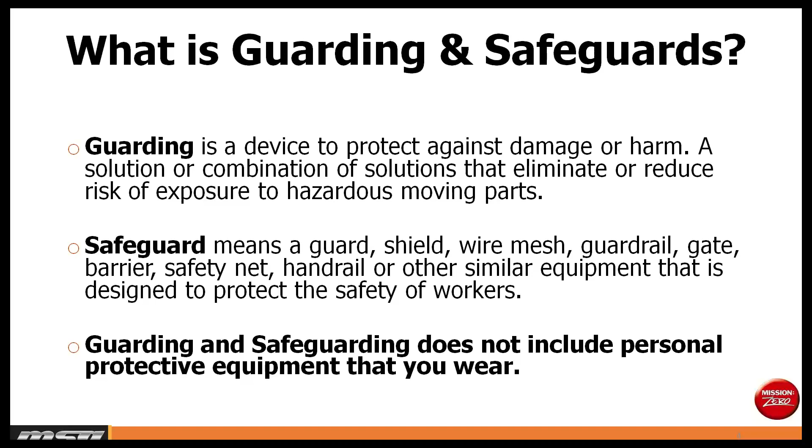And unfortunately, in our industry, 3 examples came to mind immediately that I've had some engagement or discussions with our members on. And I know there's so many more, and each of us may have been touched by a situation that involves guarding or have had calls or situations where we've been exposed to different types of guarding hazards.

And I remember this one, it happened at a small farm equipment dealership in a smaller community where a technician was testing a mower conditioner, and he was listening to the drive line just to check if there's any unusual sounds around the U-joints and support bearings, and got too close. And this was an unguarded shaft, and that person lost his arm between the elbow and the shoulder.

And I got a call from that dealership a few hours after this had happened, quite concerned with what had happened at this business. And this had a real effect on that community, the dealership itself, first responders, to witness such a traumatic event at that business. That's one that sticks out with me when I think about guarding.

Another one not as severe, a technician was pressing a bearing and the bearing shot out of the press and nearly contacted the worker, but went through the window of a combine. So a situation where guarding was absent, but it could have been as severe if it hit the worker or people in that trajectory zone.

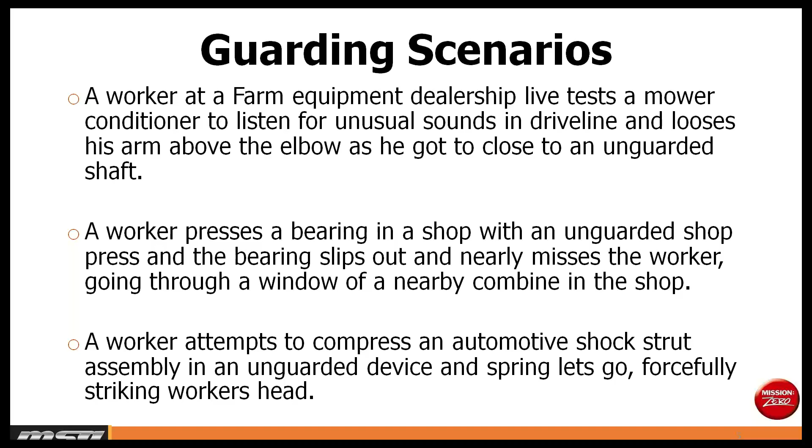We have found as well that many incidents from guarding occur because someone removed a guard, perhaps doing some maintenance to the piece of equipment, and the guard is laying behind the tool or the equipment, or it's disappeared over time, and it was just never reinstalled. And in these situations, the severity of situations involving tools, machinery, and equipment is often high when it comes to the outcome of the injury. So people can have amputations or death or very serious outcomes as a result of unguarded equipment.

And when we think about guarding, there is a relationship to lockout tag out. We cannot just solely rely on our guarding to be effective. You still need to practice lockout, tag out, that energy isolation and releasing of that stored energy when conducting that service and maintenance. For your information, we just rolled out a free Lockout Tag Out online course on our website, which I would recommend as well to people to take.

When we think about these tools and equipment, I talked about the shop press and the shock strut assembly for compressing springs in an automotive business. These did not have guards on it. It is still the employer's responsibility to ensure that safeguarding is installed. And I found this interesting. I was looking through a tool catalog, and within that catalog, I saw an advertisement to purchase a shop press, and then below it, there was an add-on option to purchase a guard.

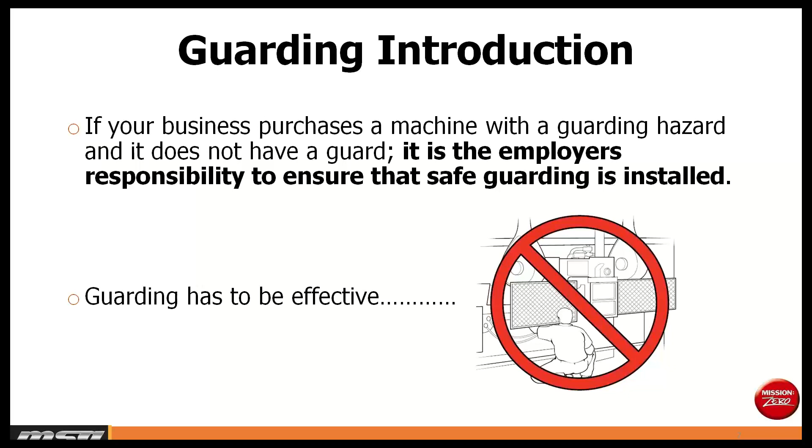And when you are looking at guarding or adding guarding to equipment, the guarding has to be effective. You can see on this picture, the person is reaching underneath the guard to adjust or maintain a piece of equipment. The guarding needs to meet standards. And one of those standards is the opening related to the hazard behind the guard itself. So we look at the hole size of the guarding as opposed to the distance of the hazard it's trying to cover. And this chart makes reference to what that hole sizing could be. The larger the hole size, the further the distance has to be to that hazard. So I will be sending you out this chart as well as the guarding standard for a reference that you can utilize when it comes to using the appropriate guarding in the workplace.

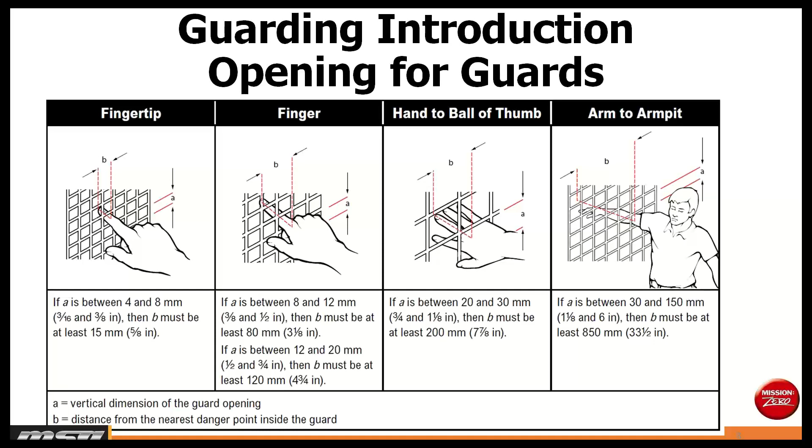And I went into our WCB statistics or data that we receive, and over a 4-year period, we've had over 2,700 claims that could be related to guarding. These were defined as contact with objects and equipment. Huge costs to our industry, over $5 million in that same 4-year period. This could cause or relate to employers paying more in surcharges, as well as an increase in possible premiums, the more usage that we have on these types of claims.

As well as for our employees, the people who were hurt. There's over 166,000 days lost experienced in our industry. And we think about that from an opportunity of absenteeism, lost productivity, and as well as people just being away from meaningful work when they are hurt from contacts with objects and equipment. So that's some of the data.

But I looked closer within our OHS regulations in Saskatchewan, and I went to the electronic PDF version. The word guard was used 48 times in our provincial regulations. And I took a copy of some of those more common regulations and have put them on the screen here.

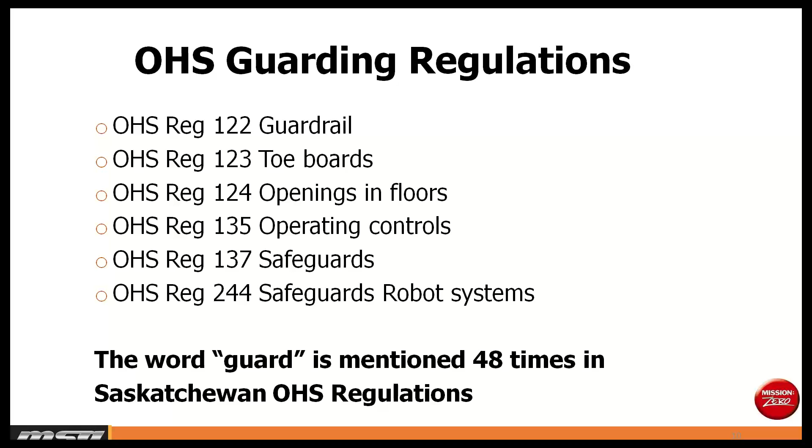I did contact the Ministry of Labour Relations and Workplace Safety's OHS division just to get a bit of a snapshot within our industry up until the third quarter of 2020, back from 2016, to look at some of those regulations and how they relate back to where our members received those contraventions. And some of these may stand out for you or not.

I did ask the officer that generated this report in regards to Regulation 244, safeguards for robotic systems. And I was told that they had been using Regulation 137 as the one that they would cite in those robotic types of systems. So I just ask you on the line here now through the question box if any of these numbers do stand out at you, or if you had any thoughts in relation to those.

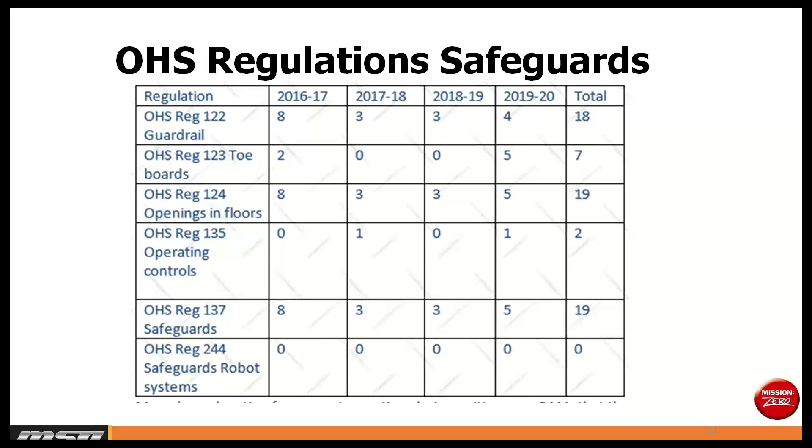And while those do come in, I want to mention my appreciation for filling out that poll. And I think that gives some good insight that 63% of you have had an OHS contravention related to guarding. So good information to fall back on here as we progress through the webinar.

I'll now talk a little bit about the hierarchy of safeguarding. And if you may have heard of the hierarchy of controls, this will be similar, but it's going to be a little bit different, and you'll see what I mean as we move through the webinar. The first step is always eliminating the hazard. So if there's a way that we can eliminate the need for human interaction in the process, perhaps we don't have to have a worker in that trajectory zone where they could be exposed to that hazard.

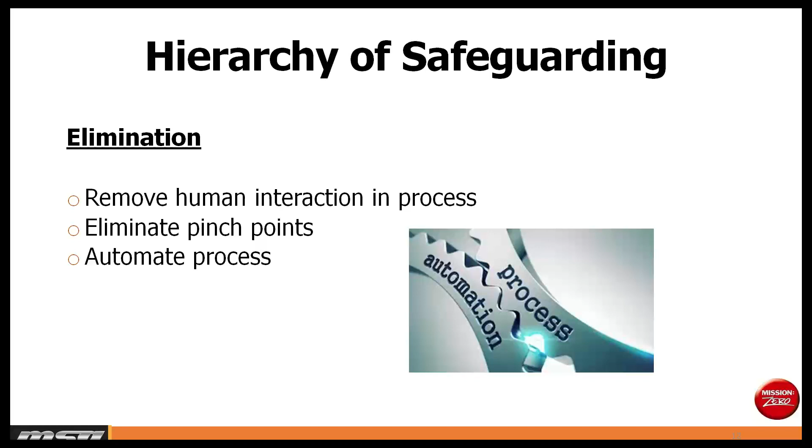Or we can eliminate that pinch point in the process so that the worker doesn't have the opportunity to be in that zone, or using the automation process if possible. So a lot of times we cannot eliminate the hazard, but this is where we want to start, is perhaps we can eliminate the hazard in that first step.

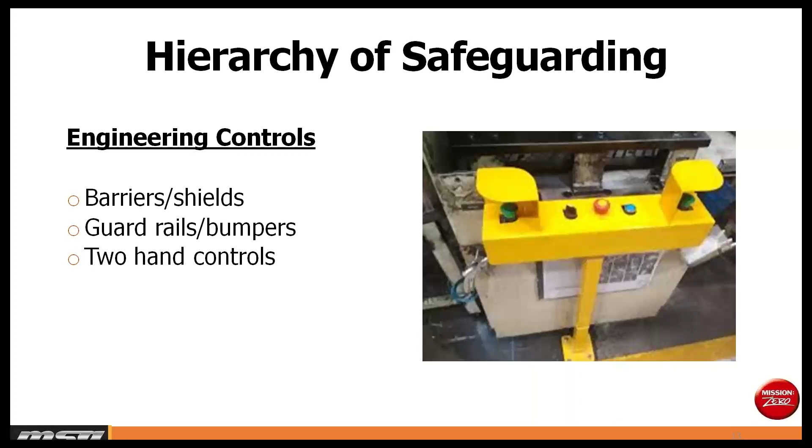If we cannot, perhaps we can look at engineering controls. And this is, I think, what I thought about, and maybe what you think about as well when it comes to guarding. Again, these are those physical devices, those barriers, shields, guardrails. On the picture, there's a two-hand type of control. And this is, I think, the physical type of engineered controls when we think about guards or safeguarding in place. So if we can't eliminate it, perhaps we can protect it by using these types of engineering controls.

And this one was new to me when I was researching guarding. These are those awareness controls. And I've only ever heard this in terms of guarding and referencing to guarding. And this helps create awareness because we can use lights, beacons, perhaps safe walkways or safe zones that people can walk in to stay away from that hazard. So we still, if we can, eliminate it or engineer it out with barriers, but these awareness controls also do that. They create that form of awareness.

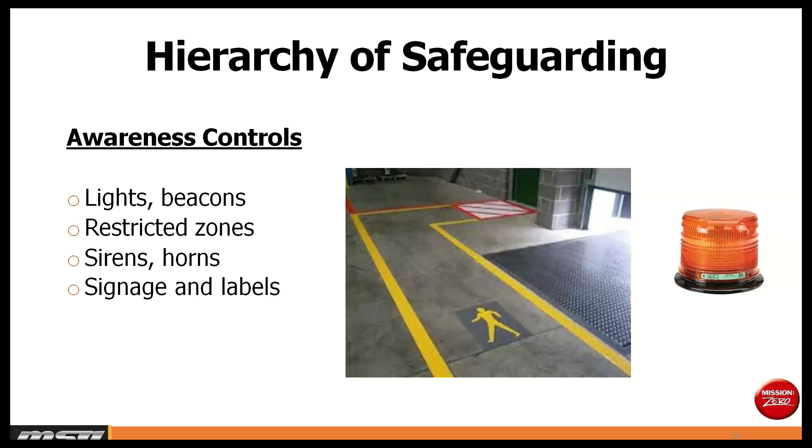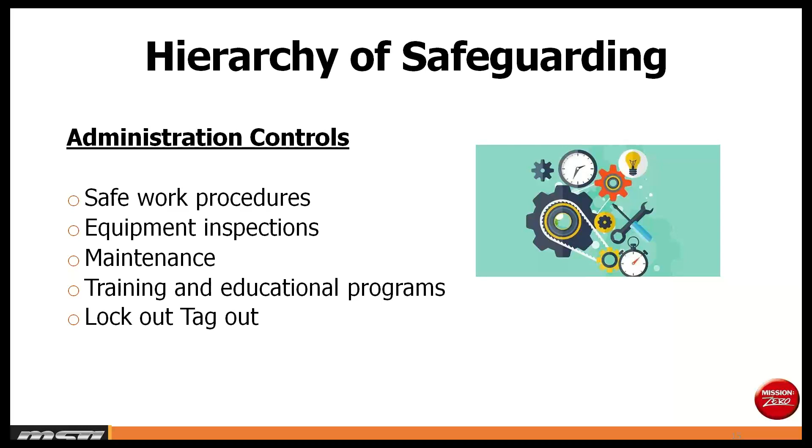Next, we have the administrative type of controls. This is what we would see on paper or process that are used in addition to the guards. This could be our training program, our inspection and maintenance, or using this type of information that we can utilize for our members, giving them that type of administrative access to training and processes of equipment and maintenance.

And lastly, the personal protective equipment. This is the final step in the hierarchy process. And remember, PPE such as safety glasses, respirators, gloves, visors, and hearing protection are not guards. The hazard is still there. If we weren't successful in eliminating, engineering it, or using awareness or admin controls, the PPE will help complement that.

So if we can still use the engineering, awareness, administrative, the PPE is that last line of defense and should never be used as your primary source of safety in the workplace. So that's just a quick rundown on the hierarchy.

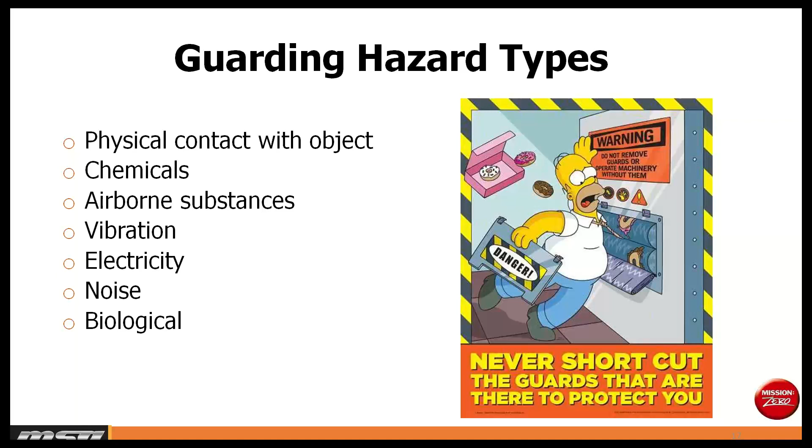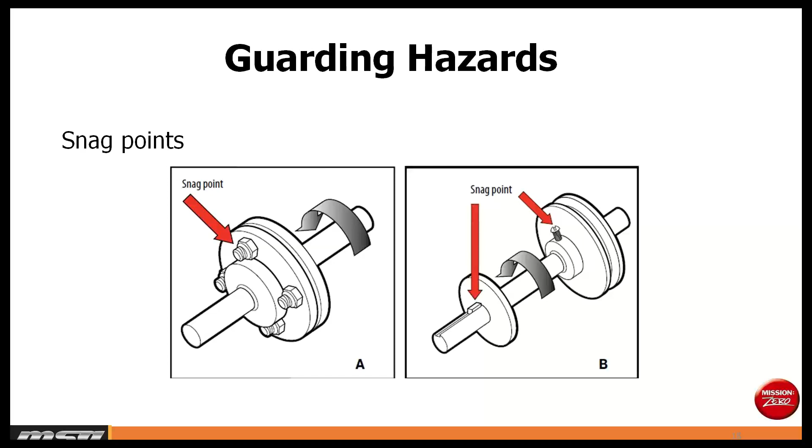The next is the nip point. The nip point occurs when machine parts move towards each other, or when a part moves past a stationary object. So we have our belt turning, and eventually it meets the sheave or the pulley, or the chain's turning and eventually meets that sprocket. At that point where it meets, that's the nip point where we can have contact. Some people may call that a pinch point, which is perfectly fine.

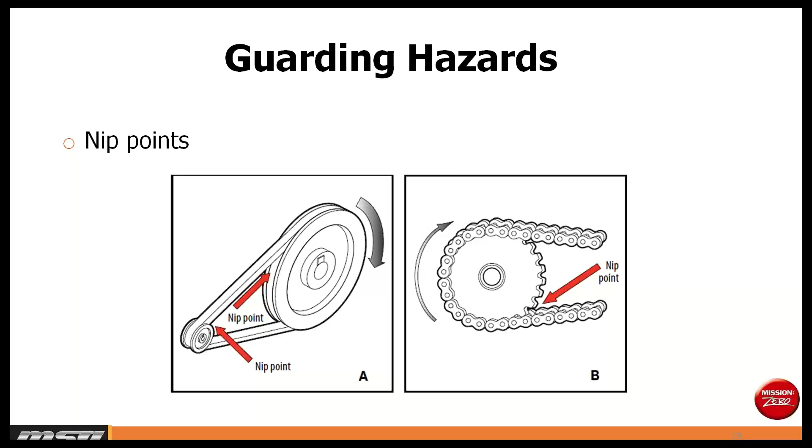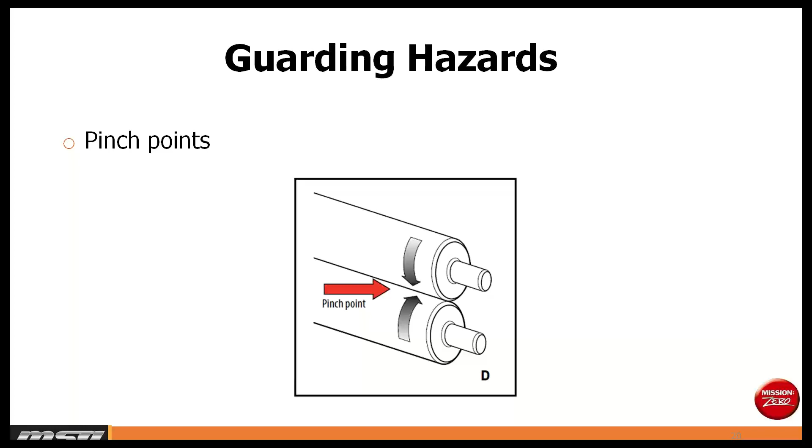So now I'm going to talk about the different industry examples, and this will make up the remainder of our webinar. I've got 36 different slides of guarding hazards with specific industry examples used within our membership. And this is where I'm going to ask you to have some fun and participate in the question box. If you've used any of these examples, say that you like it or you don't, or give me some feedback on it. And if there's something we've missed, let us know as well, because there are opportunities to share that with our attendees today. So keep that in mind.

Also, if you are obtaining any of the types of examples you see, ensure that guarding is engineered, approved, and not home built. That's an important thing to mention. As I mentioned in the disclaimer, do your homework before purchasing any of these types of products to ensure that they will work for the machine or equipment that you're going to be putting them on. I see some of our members have done excellent jobs of procuring guarding because the equipment didn't originally come with it. And again, it is an employer responsibility to ensure that our machines are guarded.

Let's talk about presses. I used this in one of the scenarios that we started with. This is a great example of a chain mail type of press guard or curtain. These are actually made right at a manufacturer in Swift Current. You can provide them with the size of your press opening, and they will build you a press guard to fit the size of your press. It kind of works like a shower rod and curtain. You can hang it onto your press by bolting it on.

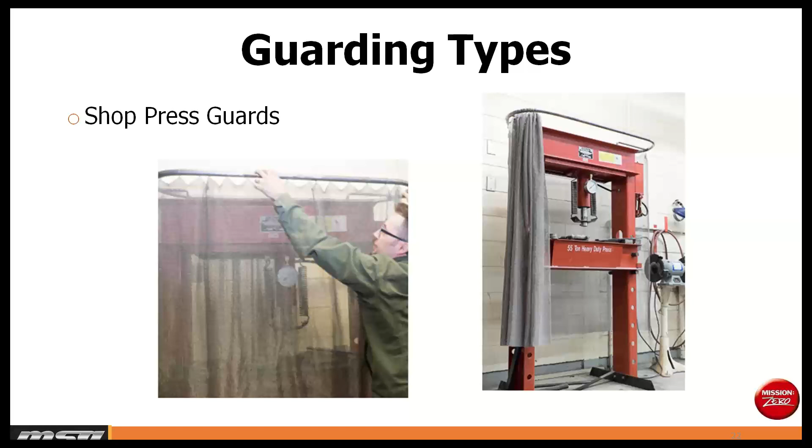And this works well. The engineer tested it at a manufacturer in Swift Current, and they had some real positive results that came out of that. So this is a great type of tool guarding that was used on a shop press.

I did see another one used. This is kind of like a foil wrap, and it encloses the area that you're pressing so nothing can fly out. The downside is this is hard to see out of because you've kind of covered the whole thing together. And if what you're pressing happens to slip out, it's not an effective guard because it's all kind of attached together. The press curtain on the previous slide was the more common one that we have seen.

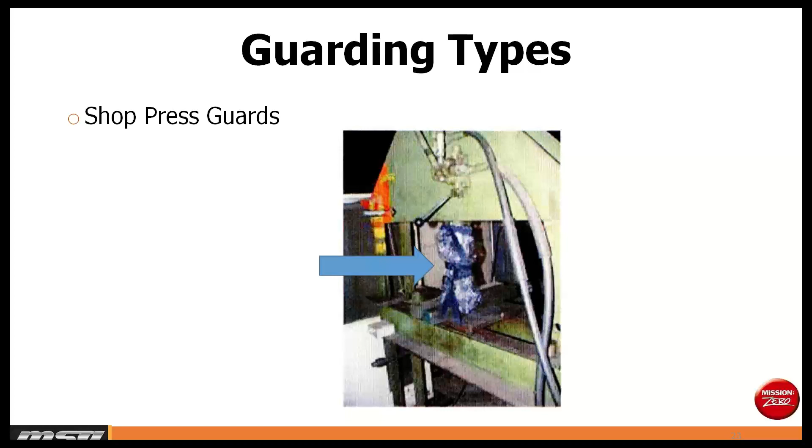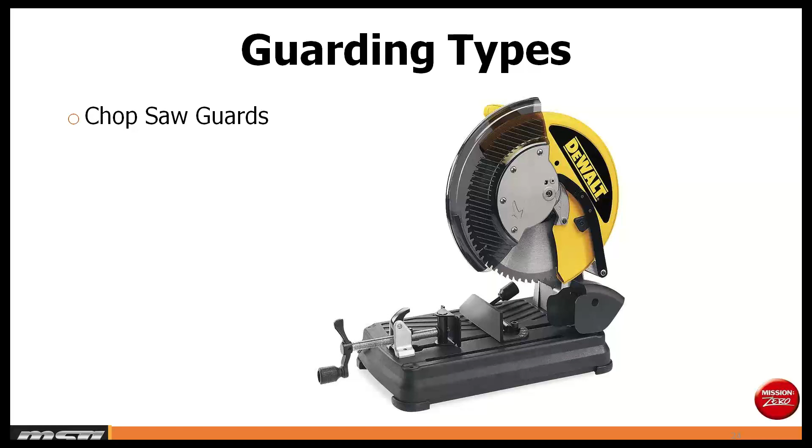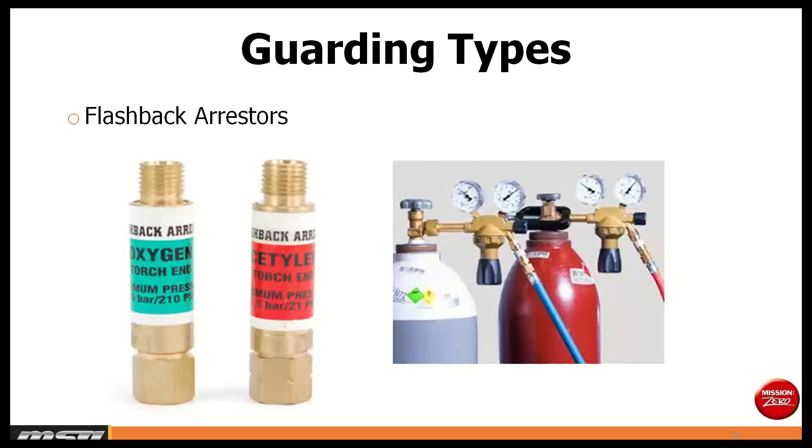You may not think about flashback arresters as a type of guard. These are commonly used on our oxygen acetylene units to stop the flame or reverse flow of gas back into the equipment or supply line to protect the user from equipment damage or explosions. These need to be located between the torch and the hose end. And they look like these little check valves as you see on your left. The caveat to this is I've sometimes seen flashback arresters built right into your regulator units with your gauges and those assemblies. If that's the case, it's going to be clearly labeled and you're going to know about that.

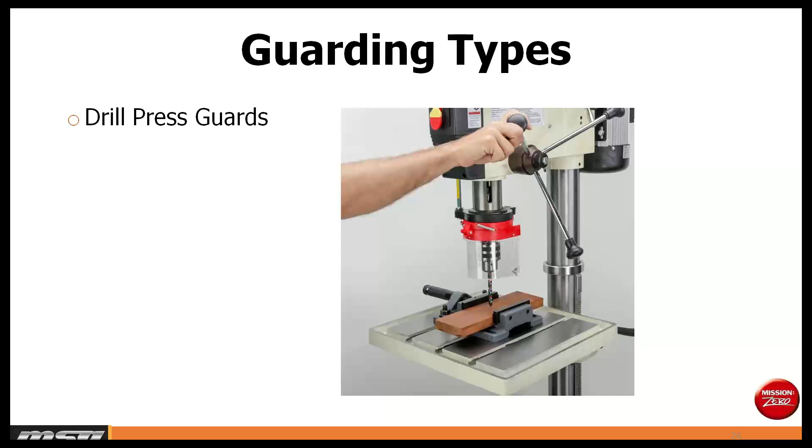Next is a drill press guard. This handy little unit clamps right onto your drill and it works like a face shield or a visor. It flips up and down so you can change the drill bit. It moves as you drill into the piece you're drilling. It's awesome. You can see through it. It's just a great guard, and I don't see as many of these out there as I'd like, but whenever I do, I always give the member a thumbs up because these are just fantastic.

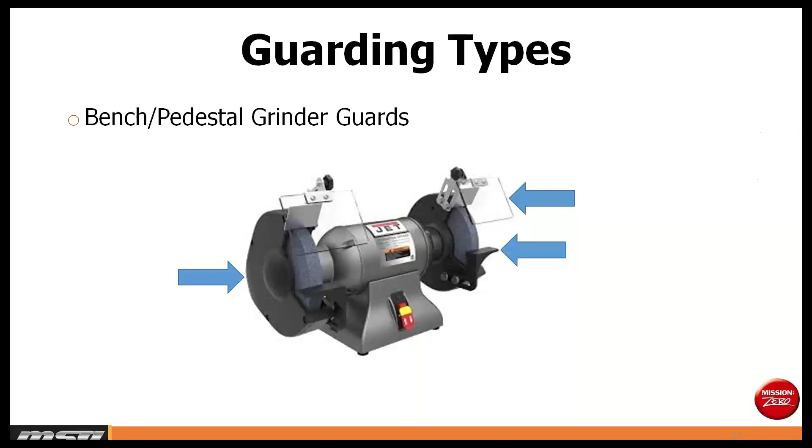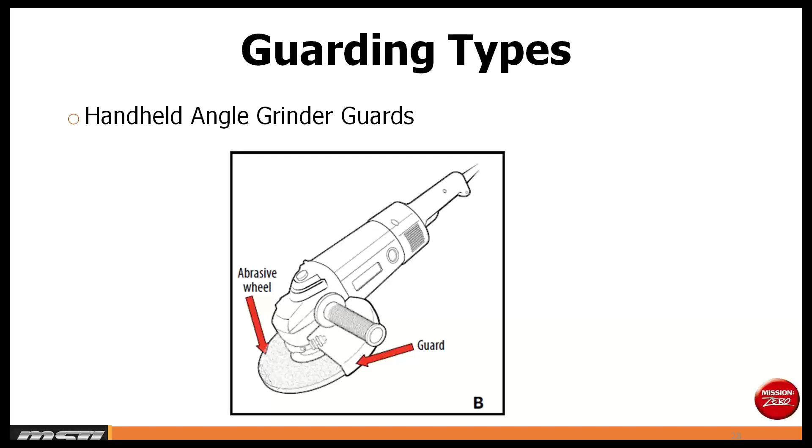Similarly to a bench grinder, when people change out the grinding wheels on this, sometimes they neglect putting the guard back on. So again, we're always looking for these types of guards when we are doing our facility inspections. And as for yourself, keep these in mind as we go through these examples. Think about what's in your facility and are you in fact using the guards?

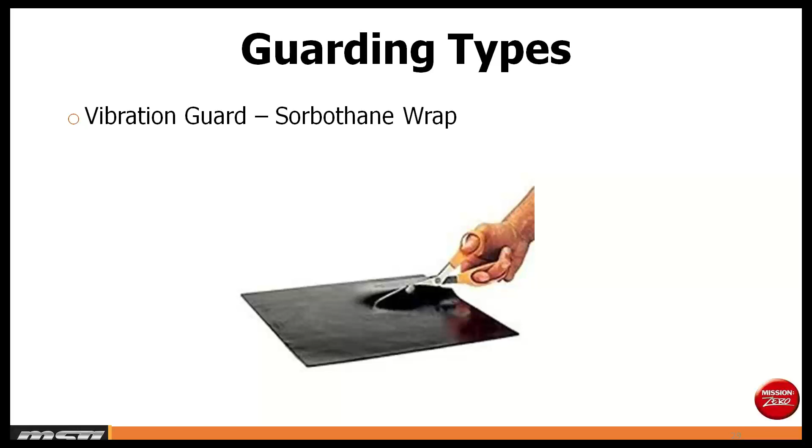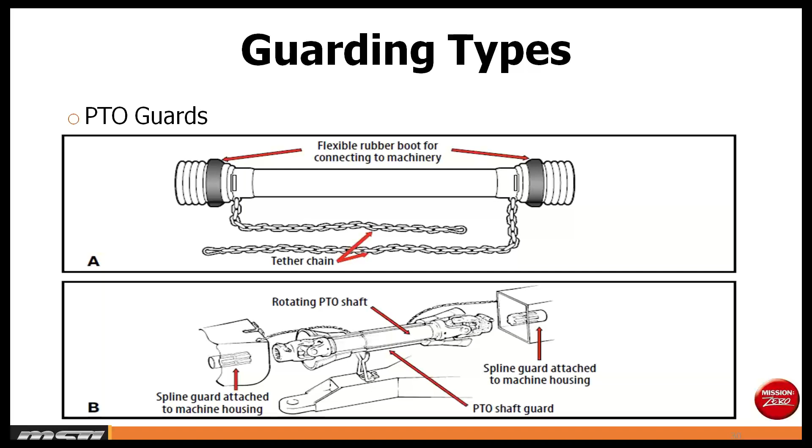The next one is a PTO guard. I won't spend a lot of time on this. I'm sure you're very familiar with PTO guards. They account for a large number of serious entanglement injuries. The top picture is a plastic guard or shield. It covers the rotating shafts, as well as the bottom picture. You see where the arrows are. Those are your PTO doors or covers. They fold down to cover the spline shaft. Could be on your input, which could be from a tractor, or the implement side of a piece of equipment where your shaft goes. So the cover itself, as well as those fold down doors, are good examples of guarding.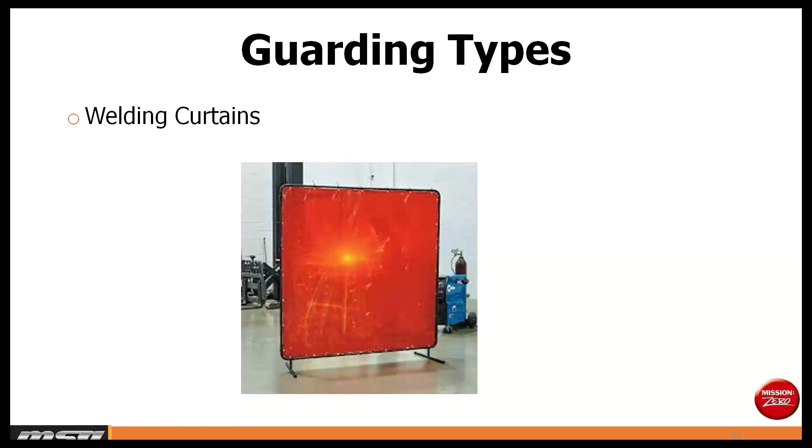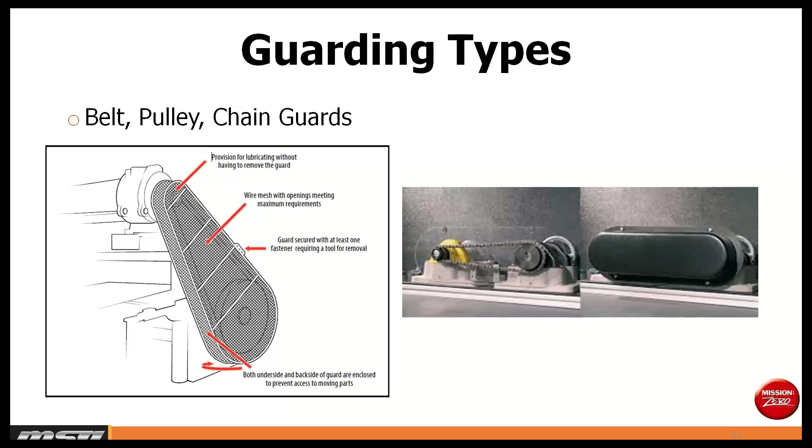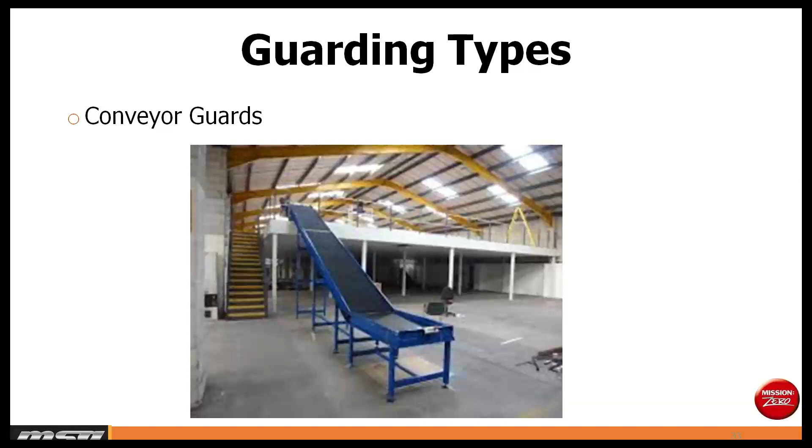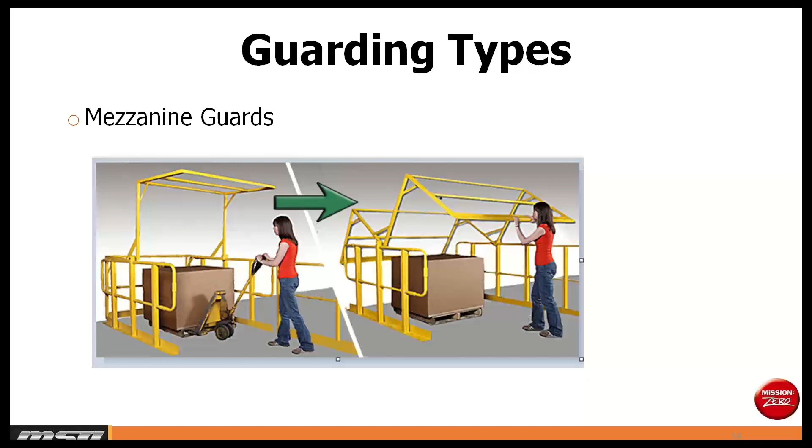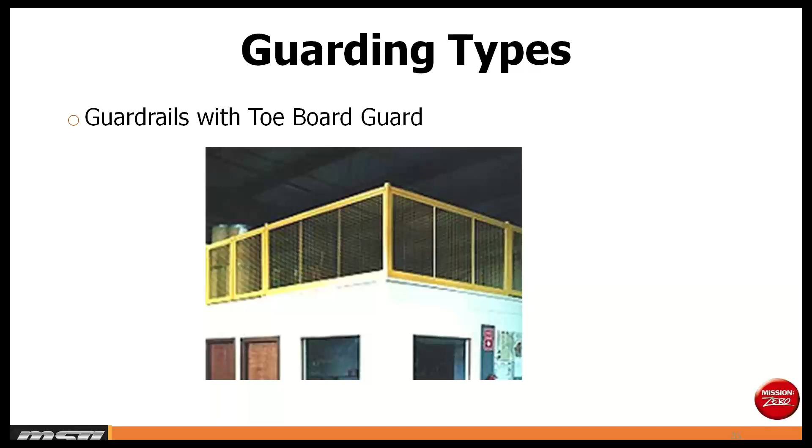And I've actually gotten into some conversations where I've upset some contractors of construction companies. We've been invited into new dealerships, and when they're building the dealership, the contractor has put the guarding up, but they didn't put toe boards on. So we'll say, hey, this does not meet the OHS regulations for toe boards. And so we have a conversation, and they eventually have to put it in. But this is one that gets missed somewhat when it comes to toe boards on the guardrails. And the toe board protects so that items don't fall through the bottom. This was one that OHS had commonly cited as well.

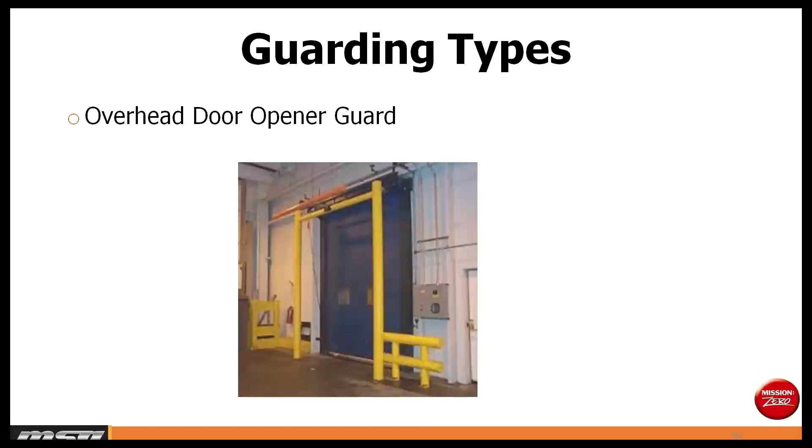Here's an example of an overhead door type of opener guard. It just prevents pieces of equipment from contacting the overhead door. So that's an example. And just to back up to the mezzanine that I spoke about with that flip guard, someone else mentioned they'd seen remote types of doors, openers, and buttons, which do work great as well. Another one I've seen used, which I hadn't mentioned, is a guardrail gate that pulls across, also used in those mezzanine areas.

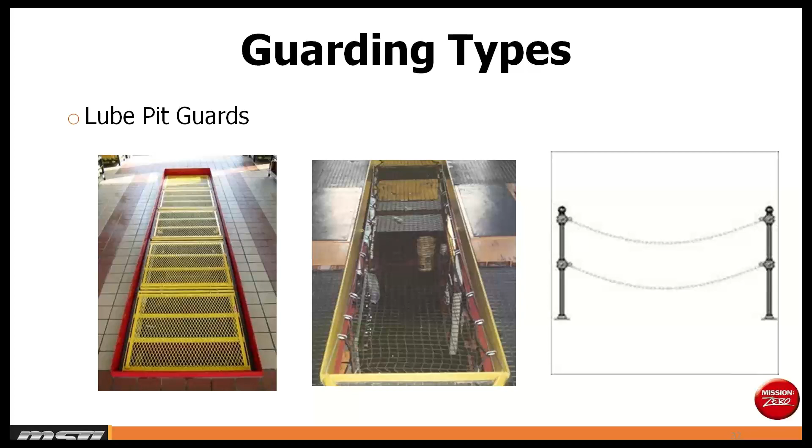You just can't run across some snow fence and call it netting and be unsure of what it actually holds. And you can also use railing around your open pits, but it has to meet regulation 122. And that just speaks to the spacing of the horizontal cross members. So again, those are some different types of examples that can be used.

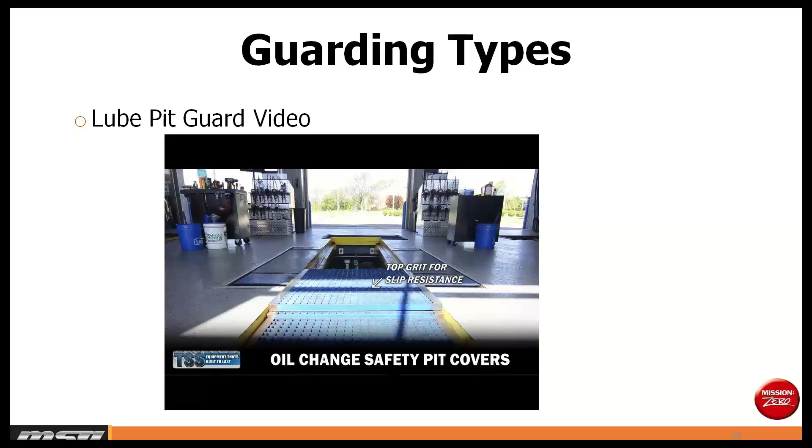And as I was mentioning that, I did put the video on. I left the sound off on purpose just to give you an example. This is that grated type of lube pit cover. It essentially slides over the lube pit, and workers can store it when it's not in use, and it quite easily slides on that type of tracking system. So again, a lot of different options out there that can be used.

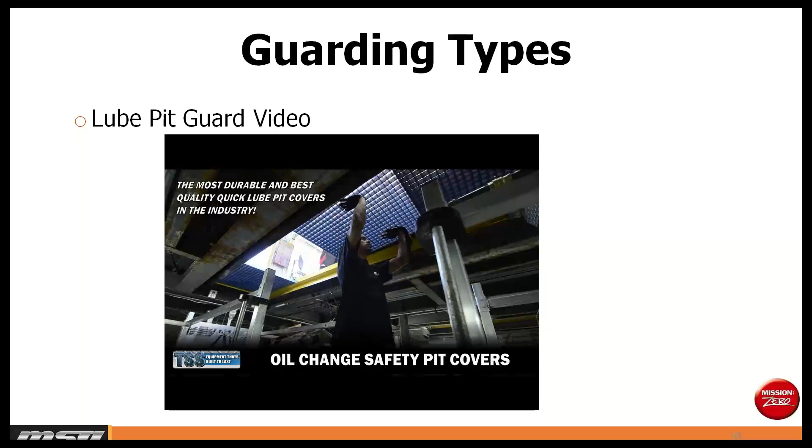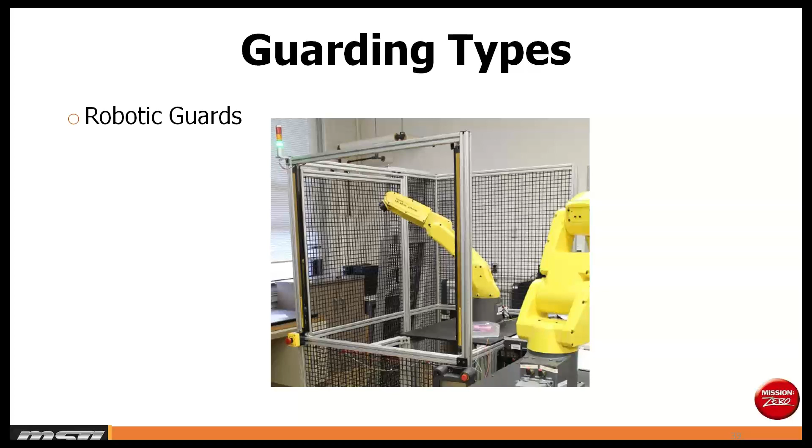If your business uses robotics, your robotic system needs to be guarded, keeping in mind the area of travel of that robotic arm, that the guarding has to be applicable. You can see on this one too, it's got that awareness control. It's got that little beacon light on it also. We don't see too many of these in our service and sales types of industries, but they are out there. And when we think about the elimination of hazards, robotics can definitely do that.

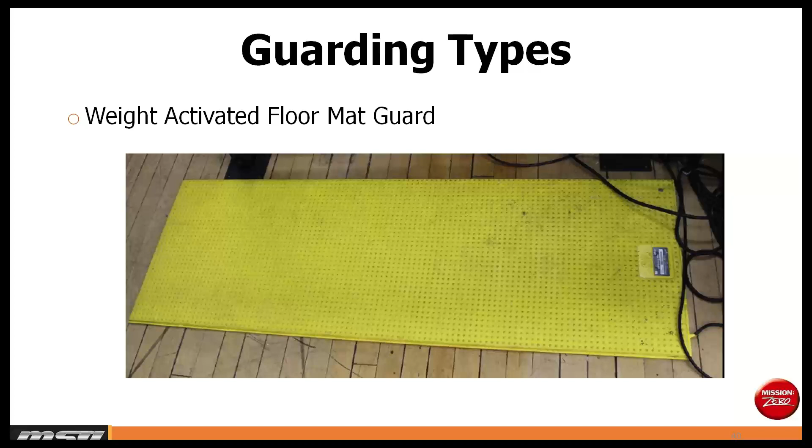Another example is the floor mat in front of a workstation. This is a guard that is weight activated because the worker has to be standing on the mat in order for that machine to work that the person is using, and it keeps the operator safe out of the trajectory zone. So it's a weight activated type of guard device that keeps workers out of harm's way, is its intent.

Another example around racking is, for one, make sure your racking is secured to the floor. And in the securing process to create guarding, there's a barrier you can put around your racking to prevent accidental contact. If you've ever seen on YouTube, I didn't put the video in there, but there's videos of people who contacted their racking with a forklift, and these things go down like dominoes because they're all bolted together. So that's why these have to be secured properly to the floor.

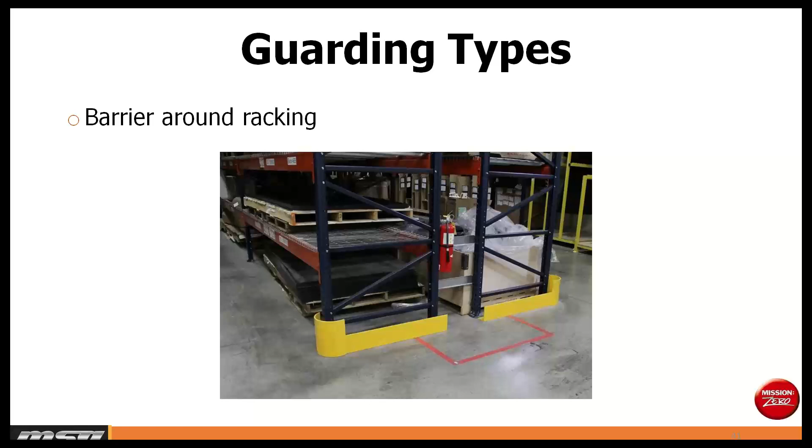And with this guarding that you see, it allows for people to have that additional barrier to prevent that accidental vehicular contact. So these are good add-ons. I'm sure most of you have racking at your facility.

Light guards, this is a very common one that we see businesses being written up for in our industry, especially in parts departments or storage areas where there's racking and people have items on the top shelf that are light, perhaps air filters or light types of parts. And if they grab those off of the top shelf, they could make contact with the light and have glass covered all over them.

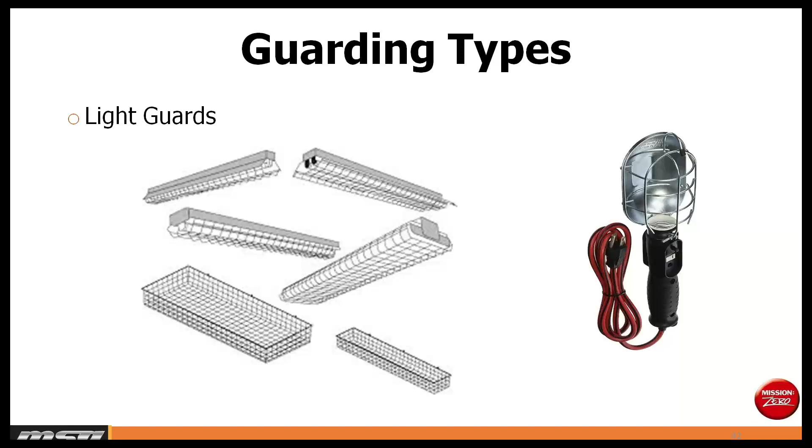So this is something, again, contractors have had those conversations. They've done renovations at dealerships. They never put the light guards on. So this is one that is very commonly cited in our regulation where businesses don't have guards on their lights when there's that close storage of items to the light area.

Another one, these next few examples are just around vehicular traffic. Having a guard around your natural gas meter prevents contact with the vehicular traffic. Damage which could occur from contacting a gas line is very severe. And even to think about winter, people are doing snow removal, they can get too close to the buildings. So these types of guards are a very preventative measure. That's something that I encourage you to ensure that you can put into place quite easily.

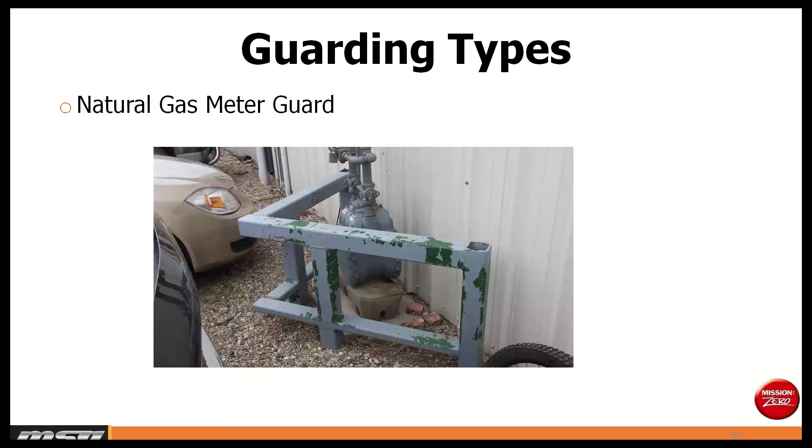Next type is traffic control guards. For traffic control guards, these could be those awareness items that we think about, such as those beacons, signage to create awareness with speed limits, routes of travel with arrows, and we're guarding against contact with vehicular traffic. And I'll tell you, we've been very busy with this lately.

Last week in our announcement to our members, we mentioned that a lot of our businesses, our membership, is getting written up for not having an adequate traffic control policy or plan in place. So we've been busy going out to members, helping them put a traffic control plan into place. And it's an example of guarding.

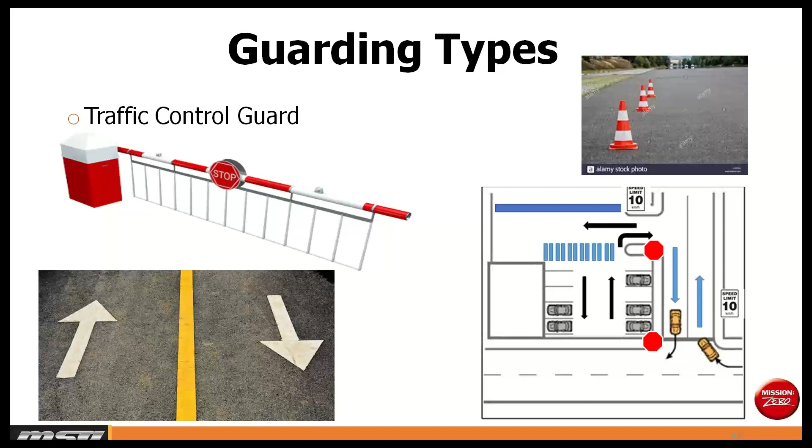And again, those directional arrows are something that's covered in that plan, as well as the drop-down arm as part of the barriers that can be used, as are these types of vehicle bumper guards that prevent damage from vehicular traffic to your building site. So these, again, help for that property damage, and it's quite an easy guard to put into place.

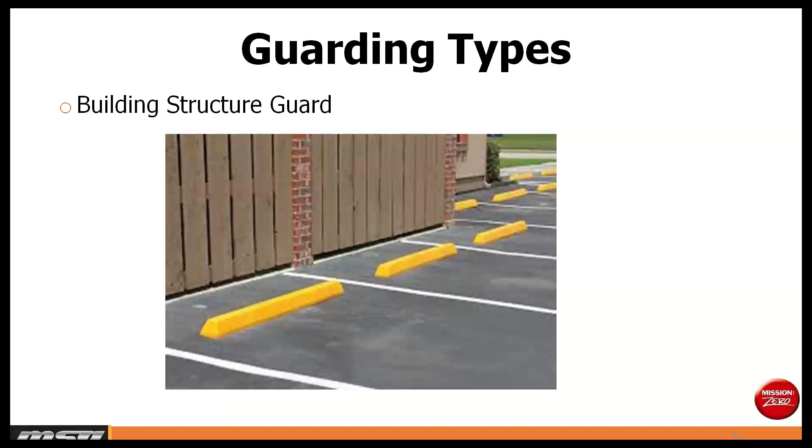Truck box hoist guards: these are engineer approved and fit underneath the truck to hold the hoist up. This is something that is critical. We've had a serious outcome as a result of this in the past in our membership, and it's just ensuring that we have the adequate tools, so we're not stuffing wood blocks in here or some stand we built ourselves. There is the right tool guard available that can be used to keep people safe. This is one of those high severity outcomes if we're not using the right equipment.

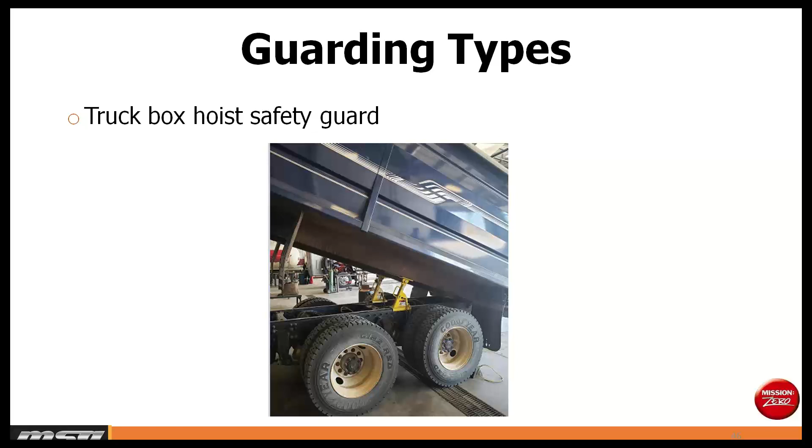I talked a bit earlier in my example about strut compressors, and the picture on the left of the strut compressor does not have a guard on it. And it never came with a guard, but it's still the employer's responsibility to ensure that the tooling they use is guarded. And there are some examples of aftermarket guards that can be used to keep people safe, as this was one that has caused serious injury in our sectors. And we always point these out when we go to our automotive type of repair businesses.

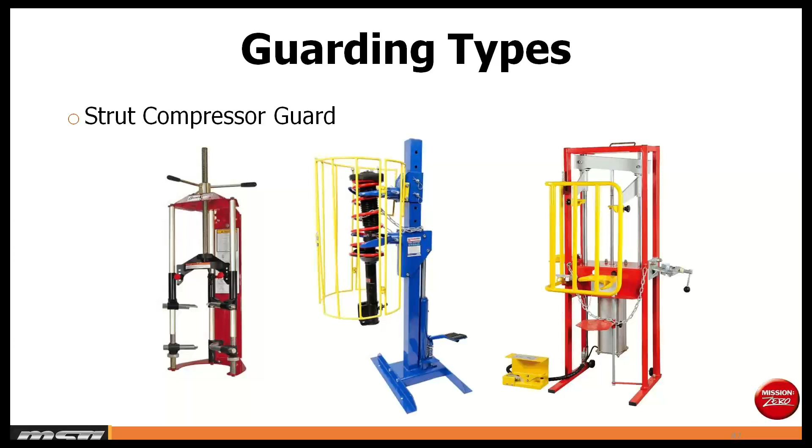Tire changing guards or cages are something that needs to be in place when people are airing up a tire. If a tire were to zipper, this type of guard will catch that tire and contain it. So this again protects people when they're airing up a tire on vehicles, heavy trucks.

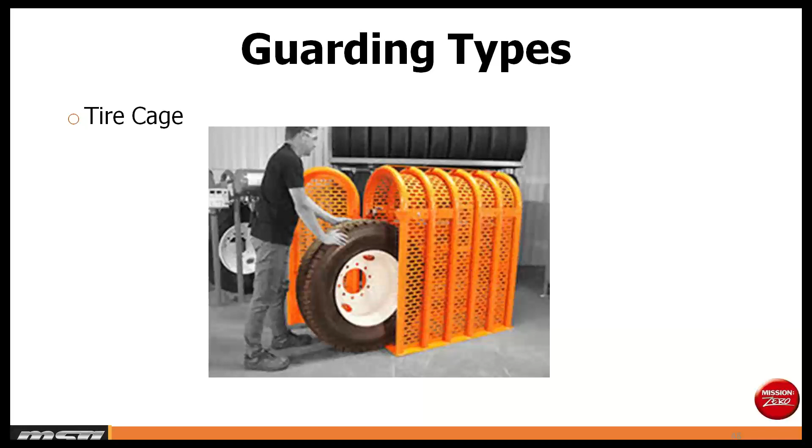This type of guard is a lot more common. It's gained popularity, especially in recent months. Sneeze guards, as we see in parts departments or front desks or reception areas, have been put into place to protect workers from airborne types of viruses. So again, you may not have had this last year at this time, but I'm sure you may have something like this now or other protocols to prevent these types of viruses.

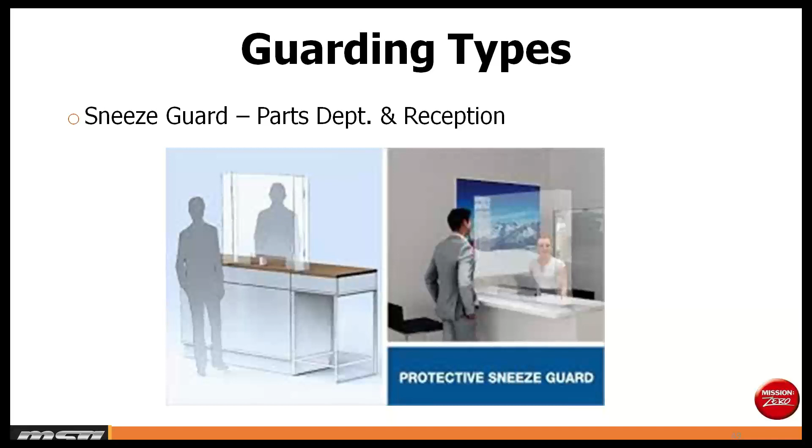Noise guards or sound curtains are designed to isolate an area or sound and to keep it in an area of containment. And when we think about our dealerships and the businesses that we work with, pressure washers, sometimes we see there's a separate room where the pressure washer pump is located to isolate that noise. Air compressors can also be contained in a certain area to isolate that noise. So I think we've really emphasized that noise control process in the past, and we don't see matting or temporary things like these walls set up, but we've seen more relocating of those noise sources, and our members have been doing a real good job of that.

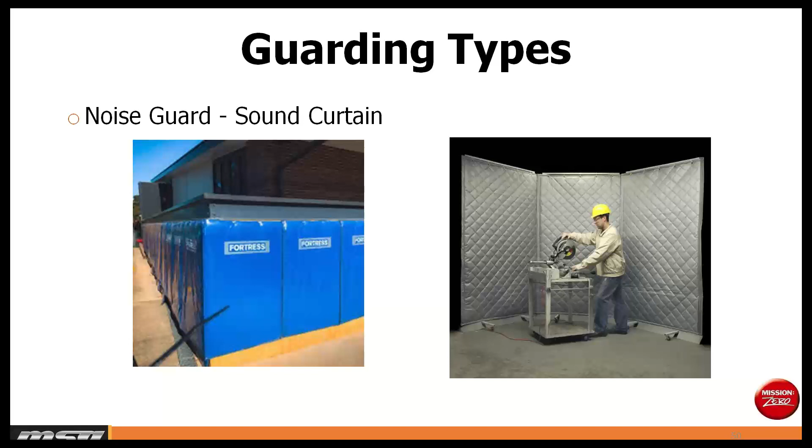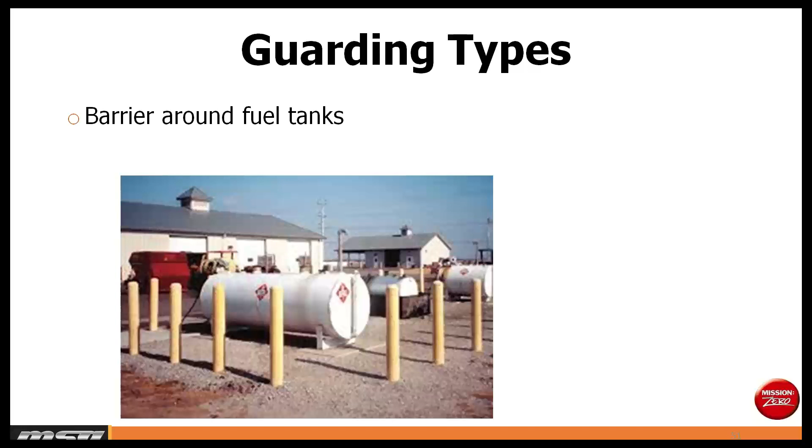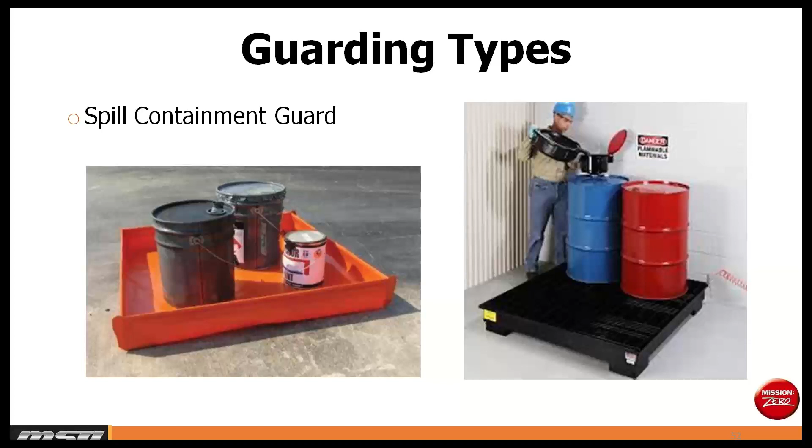When it comes to liquids, unfortunately, I don't see these enough. Some of our members have these, and this is a guard for spill containment. You can set your barrels on top of it, and if there is any type of leak, it's caught in this type of guarding. Unfortunately, I see mostly oil spills with some Zorbol or some sorbent materials around it. But I'm thinking these are going to gain a little bit more popularity. I know a lot of leading employers are focusing on protecting our environment as well, and this type of control is helpful.

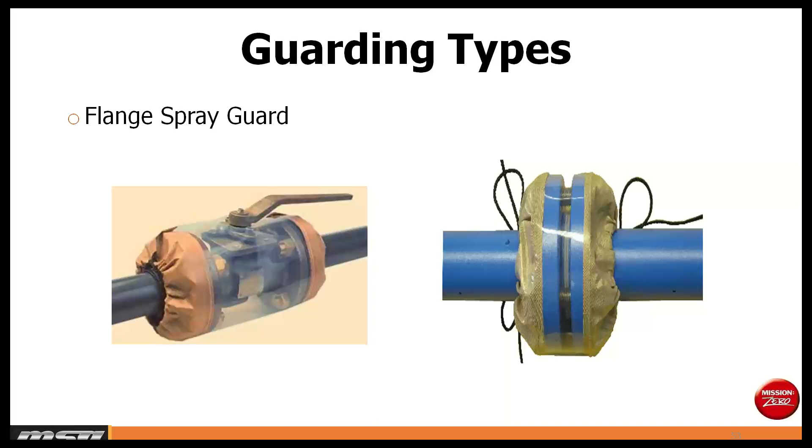As is this type of guard. If you're moving liquids, this is a flange type of guard that is designed to catch those slow leaks. And you can see through it whether you have a leak or not. So that's a great example of that type of guard if you are moving those types of products.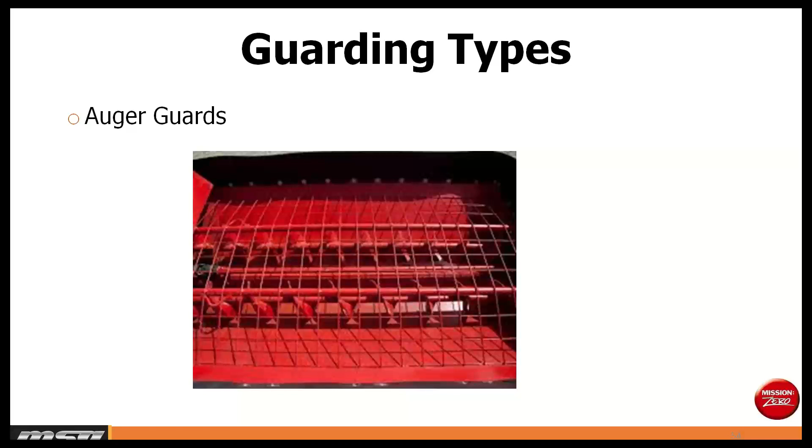As well as auger guarding on pieces of equipment. In our industry, we work with companies that are working with grain distribution, and they're servicing augers and flighting, and just to ensure that the necessary guarding is in place to prevent being caught in auger flighting. Very hazardous and severe.

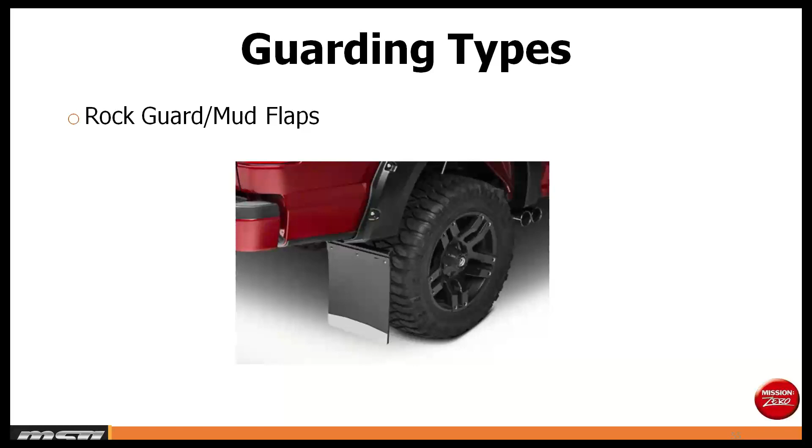Mud flaps, an example of guarding. These are mandatory in Saskatchewan, to have some sort of mud flap. These are designed, or rock guards, to protect windshields from paint chips or flying rocks as we are moving down our roadways. So if we're pulling a trailer or an RV, it's good to have guards in place for sure.

And on an RV, we have a propane type of guard that covers our propane tanks. They slip over the propane tanks, and we work with our RV dealers closely. And this is something where you want to ensure your RV tanks are covered, again, to protect from that flying type of debris.

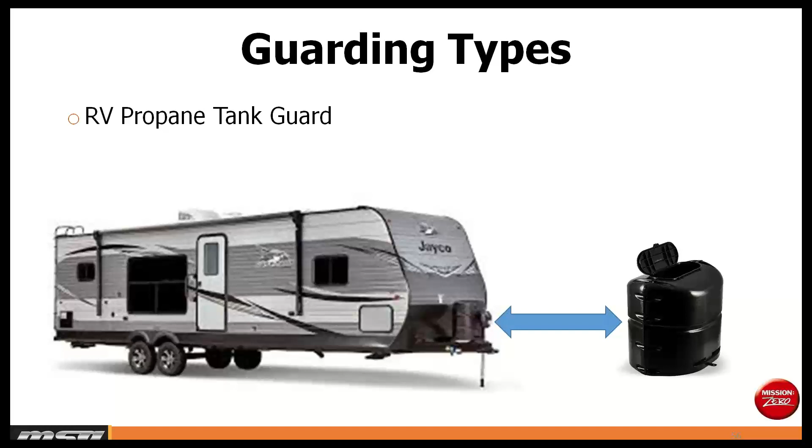Our last industry example is just around fans. If you have rotating fans and shrouds in your workplace, ensure that the correct shroud cover is on your fan to protect against moving fan blades. Remembering what we talked about earlier, having the chart to know about the specific sizes of openings when it comes to guards on our fans is essential. We want to ensure that these are covered properly.

So I'm going to launch a little bit of a poll here. After seeing the many industry examples, were you surprised by the many types available in our industry? And as you answer that, I also ask for your questions and comments. We went over 36 different examples fairly quickly, but did we miss anything? Is there something in your workplace that is a guarding potential hazard that there's no guarding in place of? I'll just give you a few seconds to answer the poll on that, and to look at that as well for potential types of hazards.

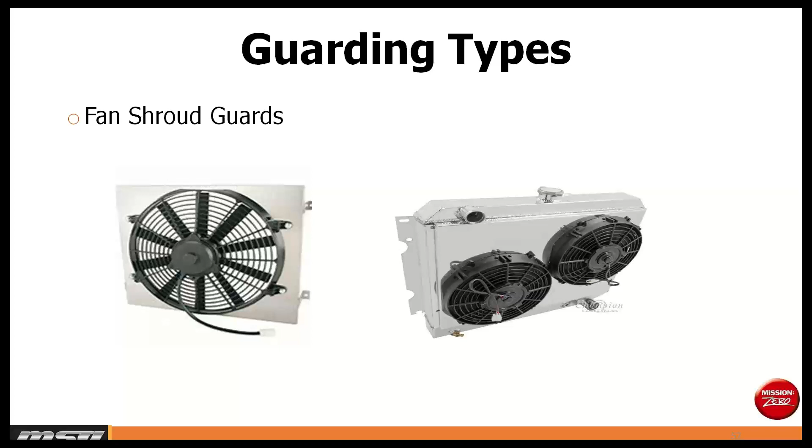So while I wait for those responses to come in, I'll share the results of the poll. It was a 3/4 split: after seeing the many types of guards, 3/4 of you were surprised by the different types of examples available. So thanks for your engagement on that poll. Again, I'll leave you another minute or two to enter some questions that you might have, or different thoughts around guarding examples that were missed that I can still verbalize to our attendees.

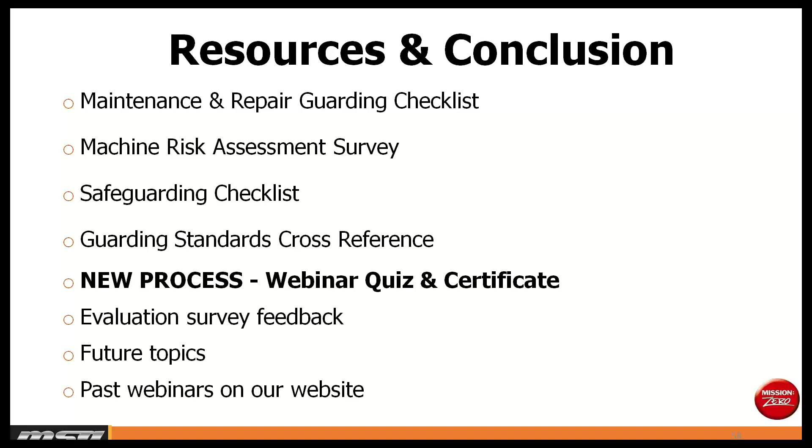I had not seen any other questions come in, so I'll conclude by thanking you for participating in today's webinar on the introduction to guarding. We had some fun looking at the different industry examples, talked about some of the serious scenarios that had happened, and some of those definitions around safeguarding and guards itself.